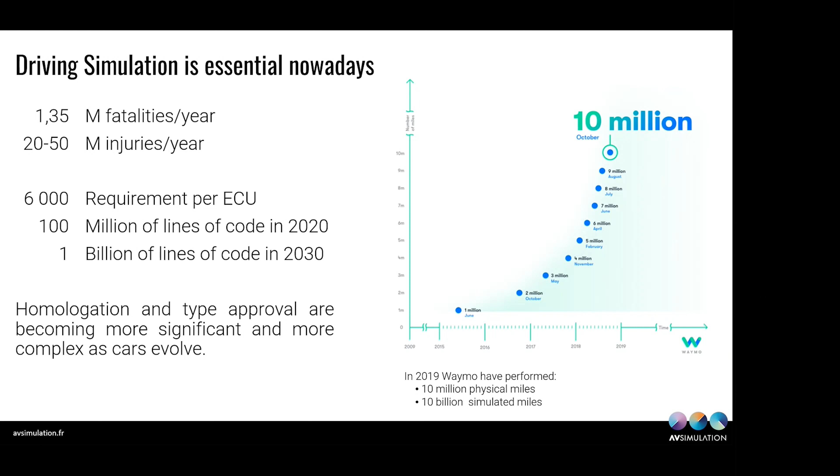And homologation and type approval are becoming more and more significant as cars evolve, because authorities need to trust that the vehicles put on the market are safe, tested and validated. So to answer this trend of simulation, testing and validation, we, AVSimulation and UTAC, have been bridging the gap between virtual testing and physical testing, because we have a unique partnership between an industry actor that is expert in testing and homologation, UTAC, and AVSimulation, whose expertise is in simulation and scenario making.

So together, we built a unique partnership, the first solution in the world to incorporate these kinds of features from experts in testing and homologation and experts in simulation. And we managed to create the NCAP and regulations SCANeR scenario pack, which will allow you to test and validate your vehicles in real scenarios that have been built by UTAC, but Jeremy will talk about this later.

And as we've mentioned, this is a mega trend because simulation will be needed in the future. One of the best examples is that ALKS homologation for level 3 automated driving is coming, and this will be a regulation, not only a feature of the vehicle. So this will be needed for every vehicle that has an ALKS, up to level 3 automated driving.

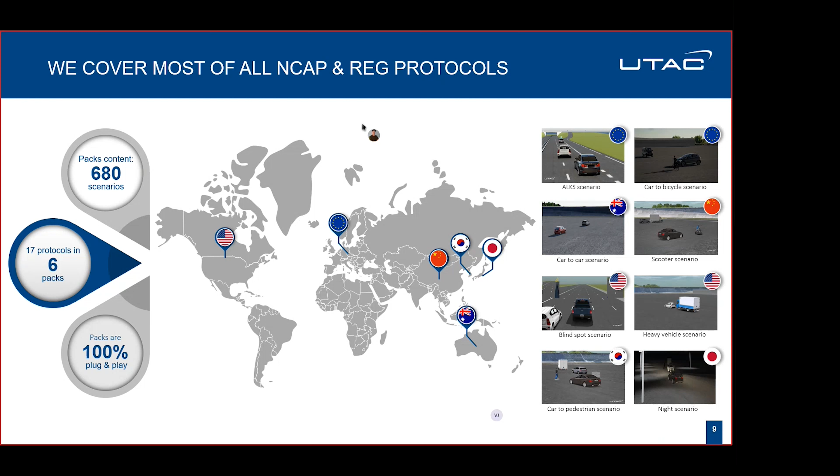So I will show you all the content of each pack. For the European pack, you will have the AEB 2023 with all the scenarios like the head-on, the car-to-car crossing, the pedestrian scenario, also bicycle, and a scenario that is new in this protocol is the scenario around the motorcycle. We have also the AD protocol of Euro NCAP 2021, and you will have access to ALKS scenarios with also the scenarios from Annex 5, like the entering, traffic light, and so on.

For the Japan NCAP, you have all the protocols for the scenarios for car-to-car, car-to-pedestrian, including night tests, which are very important in this protocol. And for Korea, you will have access to all the scenarios for car-to-car, pedestrian, bicycle, and also lane support system.

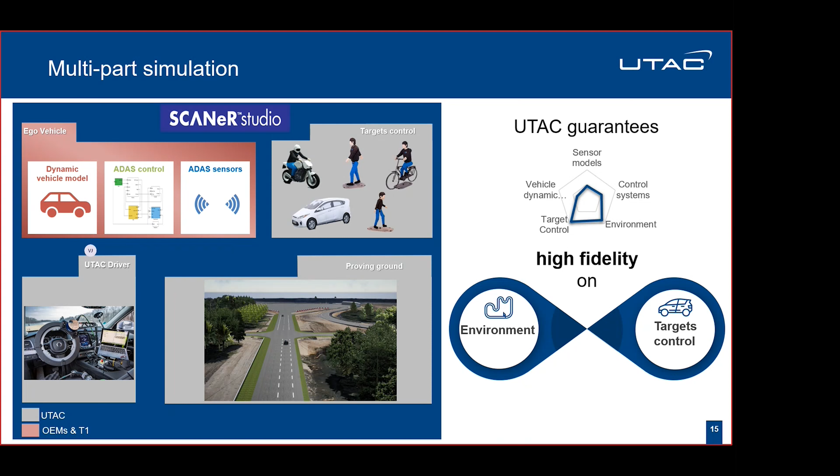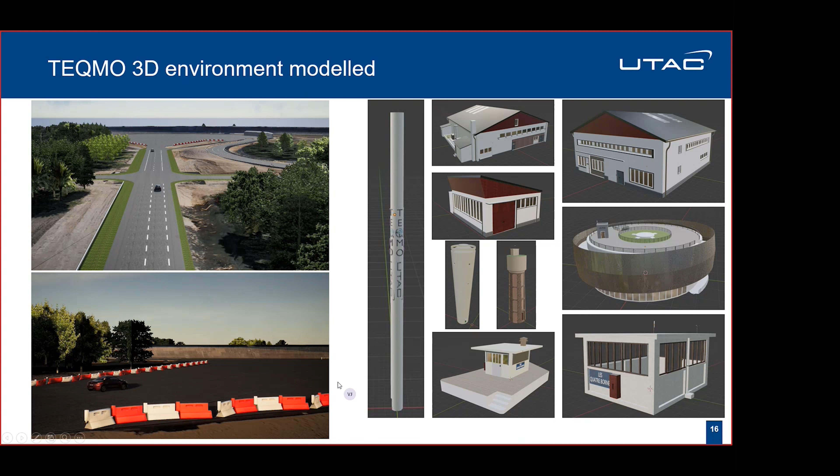So this is just an overview of the Teqmo proving ground at UTAC that we have modeled. As you can see, with Unreal Engine, you have quite good fidelity of images for the camera sensor, for example. We have modeled all the buildings on the proving ground, and we have all the shadows moving with the sun and so on. And this is quite important for ADAS validation.

So for the driving robot, when you perform a test on the proving ground, you will have a steering robot, an accelerator robot, and a braking robot to test your vehicle. This means that your test will be repeatable between each vehicle that we test in physical tests. And we have modeled all the behavior of these three robots, including the trajectory following for the ego vehicle, the speed following also, and something quite important for FCW scenarios is the calibrated braking robot, because in the protocol you have a force to put on the brake pedal to have the right deceleration of your vehicle.

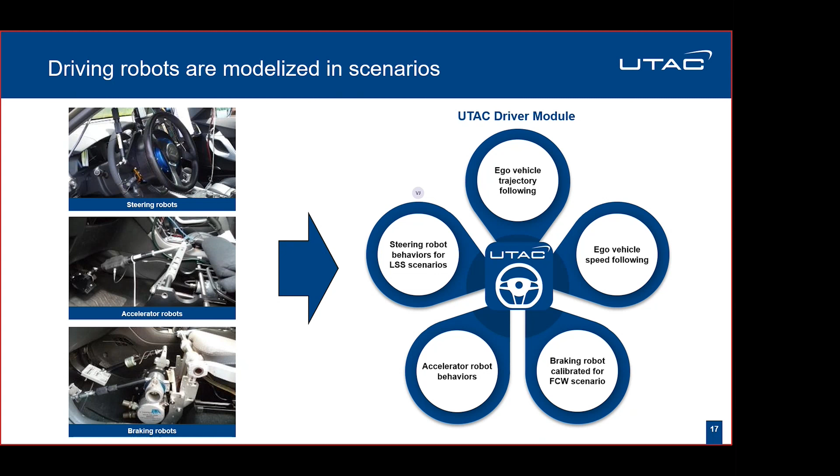And we have also behavior for lane support assist systems. For example, when your vehicle goes on the lane, the steering robot has to release at a time, and this is in the UTAC driver module.

This is UTAC Score, the application linked in real time with SCANeR Studio. We are currently updating UTAC Score to allow it to work with massive simulation.

On the left screen, you can see SCANeR Studio running, and on the right side, you can see all the colors of your NCAP protocol according to the performances of the system. Basically, you can run all the scenarios during the night, and in the morning you will have all the score of your system.

Something quite important also, you can save the spreadsheet with all the performances of your system, and you can load it also to compare it, for example, to your physical test and to make a correlation.

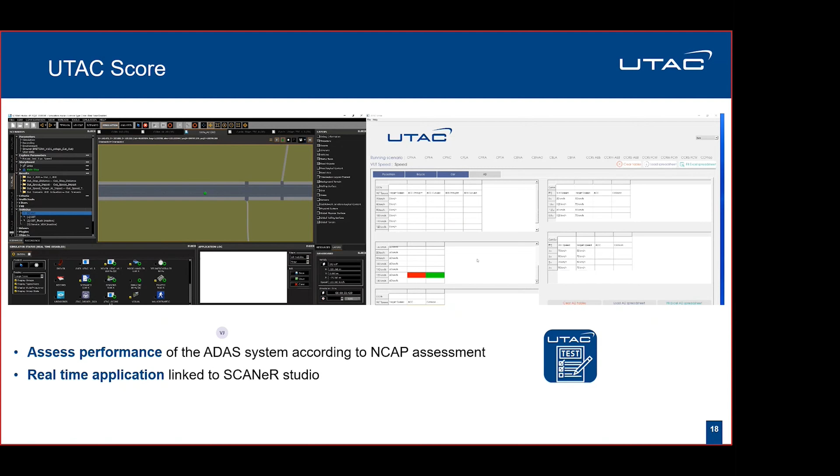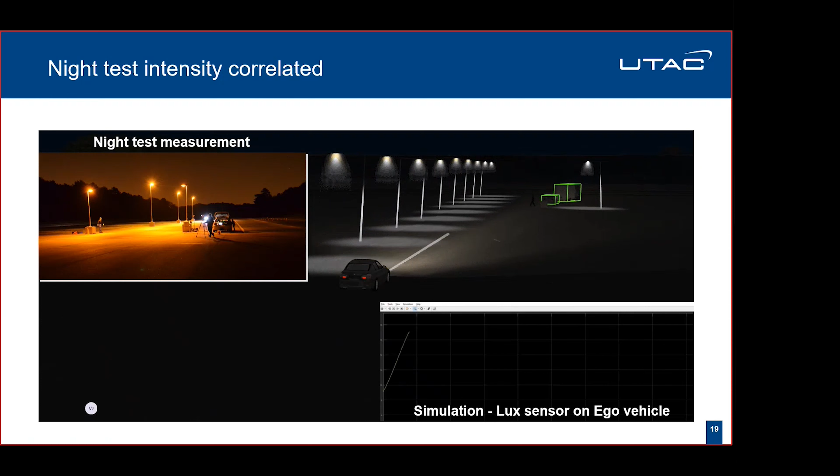For the Japan NCAP and also Euro NCAP, you have a night scenario. As you can see, we have correlated the luminosity seen by the vehicle in the simulation. We have performed a lot of night test measurements on our proving ground to have the right luminosity seen by the vehicle.

This is just a video to show you a digital twin. On the top left side, you can see the real test, and in the main screen, you can see the test in the simulation. So the digital twin is very important for us.

All the scenarios that we develop, except for example ALKS which is a theoretical scenario, we collect all the data on the proving ground to match what you will have if you test your vehicle on our proving ground.

Something new this year, we have developed all the ALKS scenarios, including the Annex 5 scenario. For example, you have a closed lane entering scenario. You have traffic light also and exiting.

So all of these scenarios can be run in massive simulation, and you have access to variables to generate a lot of scenarios around that.

The main idea is to validate your ALKS system, because vehicles are incoming with this system, for example the Mercedes Class S. And you can tune your system and see if you can pass the homologation of your ALKS level 3.

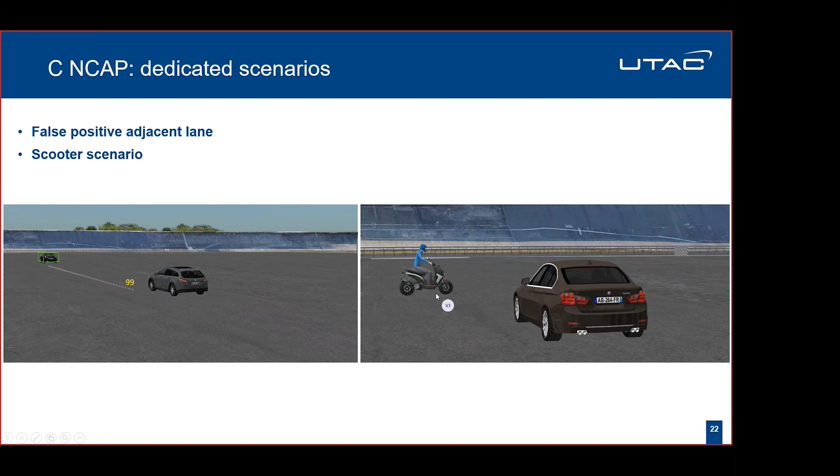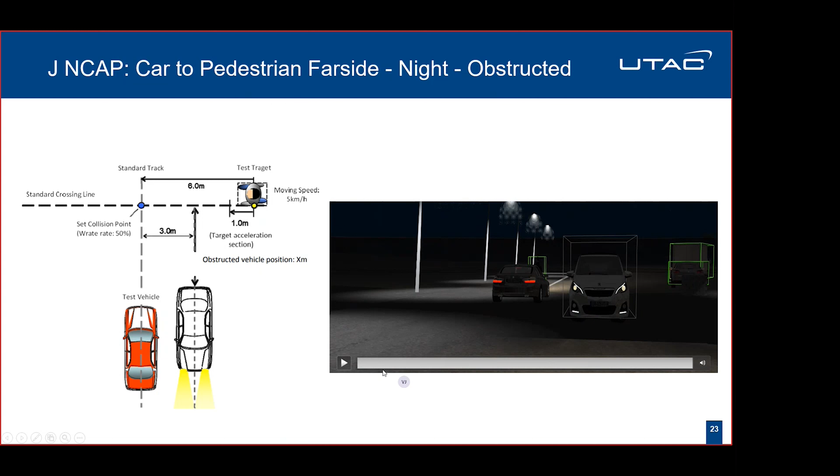So it's an important system to validate, and with the simulation and UTAC driver, you can have the same scenario as you will have on the proving ground, with the same reaction of the driving robot.

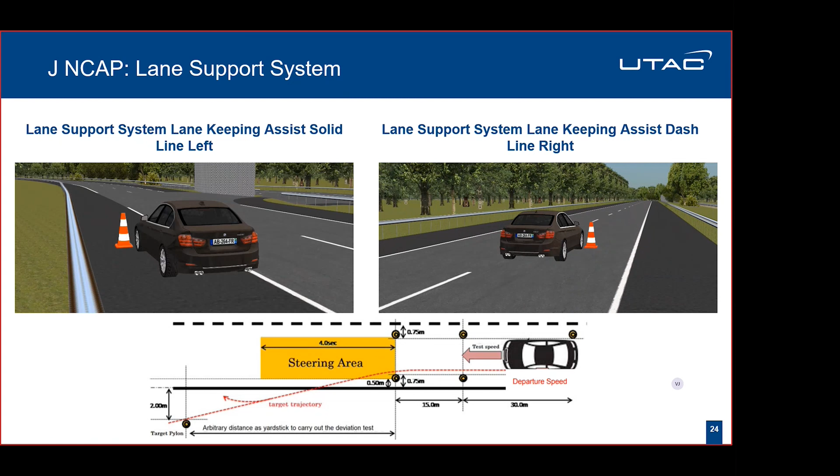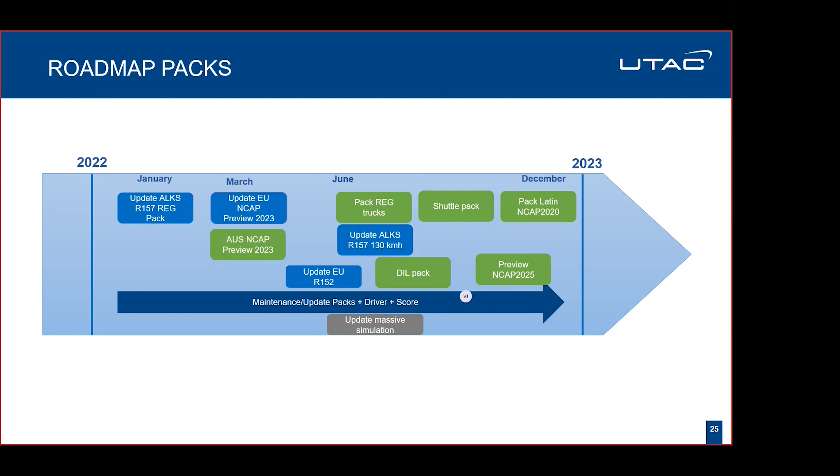So let's resituate a little bit this NCAP and regulations pack into our SCANeR offer.

Just to remind you, oh sorry, there's a little bit of lag on my side.

Just to remind you that SCANeR has different packs in which different features are embedded. First, the foundation pack is self-sufficient. This is the first pack needed to run SCANeR Studio, so it includes all 5 modes of SCANeR Studio. The simulation can be run standalone with this pack, but we can add different packs made to test and validate different functions of the vehicle.

We have the AD ADAS pack for testing your AD ADAS systems. We provide in this pack functional sensors, perfect sensors as we call them, that will provide, no matter what, the information from the simulation that you have asked, in order to feed your system under test, your AD ADAS software.

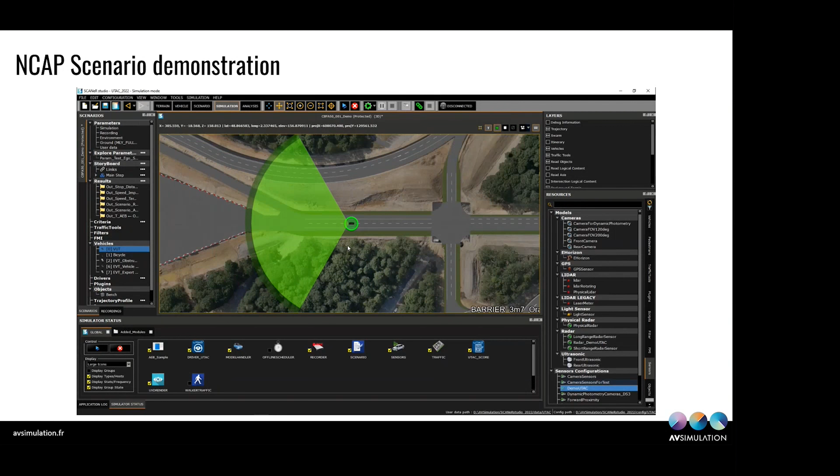Also you can change all the parameters for the sensor, at different beams, their horizontal and vertical fields of view, the different targets that they are detecting, etc.

So now that we have shown that there is a sensor, we launch the simulation with our AEB that is plugged into the simulation. This is a basic AEB only for demonstration purposes, but on your side you will be able to develop, I believe, more advanced AEBs.

So the simulation launches with the parameter here of the speed of the vehicle. As we can see, it is running towards the target. You can see the vehicle speed, the target speed, the distance to impact. And now we see that the bicycle is moving according to the vehicle and that the vehicle stops.

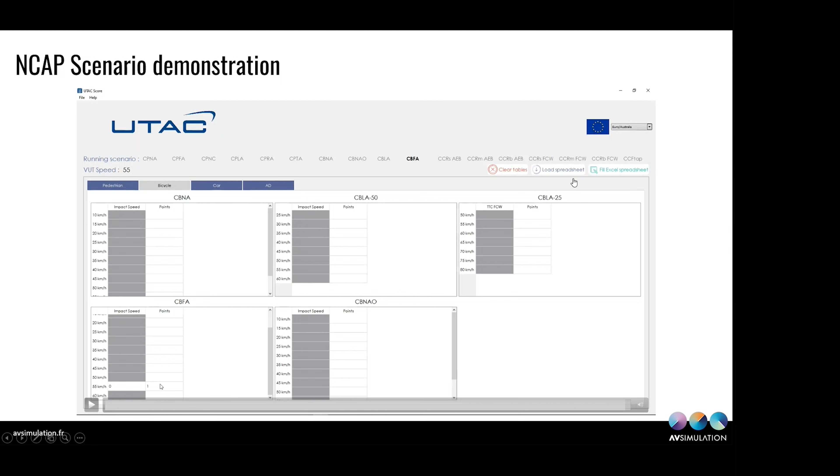After we have completed our test, we will have UTAC Score, as Jeremy showed you. You see that in this tab, in this array, we have here the number of points that our vehicle has in this test at 55 kilometers per hour. So you're able afterwards to save this spreadsheet and also to reload it after, to compare it to other vehicles.

Keep in mind, if you don't have the in-house expertise to generate and use these scenarios, we at AVSimulation have a services department that can help with all these things and provide help with homologation of your vehicle. We can advise on how to build your tests, your vehicle's dynamics, your different sensors, how to add them to the scenario, or if you're willing to delegate, we can build and operate the simulation for you. We can provide one or all steps in the workflow of your testing in simulation and homologation, and afterwards you'll go to the proving grounds with the results we've provided.

The real focus of these packs is for you to ace your NCAP and regulation tests. This is done by interfacing your own model into the simulation, either vehicle dynamics or sensors. If you have a full vehicle dynamics model in Simulink or FMI, it's totally possible to import this model into the simulation loop, into SCANeR. This enables you to run tests using your actual systems, whether ADAS systems or physics-based sensors. You can also incorporate your full vehicle dynamics and perform these tests in massive simulation, enabling you to ace your NCAP and regulation tests.